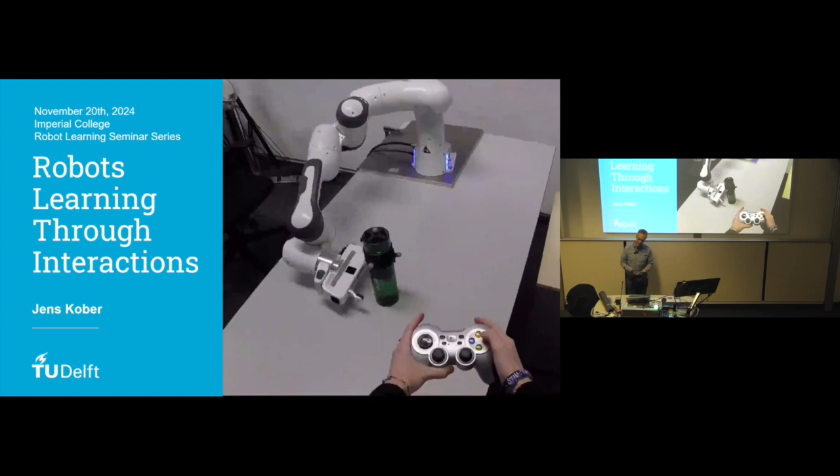Before I actually dive into the details of the methods, I very briefly wanted to start with an introduction. It's not going to be terribly scientific. I'm not an expert on that, but like many people, I at least take inspiration from human learning. And I believe there's lots of parallels between how humans learn and how robots potentially can learn.

I guess all of you are familiar with imitation learning and reinforcement learning. Imitation learning is the idea that a robot learns from demonstration and then tries to mimic that, which works fairly well for simple tasks. For more complex tasks, like humans, robots also need to practice, which you call reinforcement learning. And to actually make those work nicely, there's many ideas you can take from human learning.

So effectively what you do is build up a skill library and then try to figure out if you can actually transfer one of the previous skills you've learned to something new. And there's quite a lot of approaches in robot learning that do very similar things.

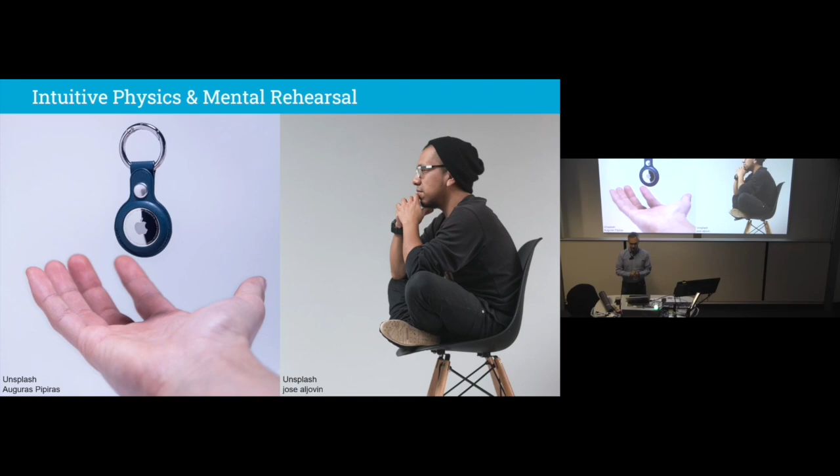So this talk is really going to be about teaching through interactions, to have some kind of continued student-teacher interaction, which could be additional demonstrations, some other kind of feedback, not continuously, but once in a while, so intermittently. When we started working on that about 10 years ago or so, there wasn't much out there, but that's now actually coming up more and more in robot learning, where people realize that really you can speed up things if you pick the human's brain.

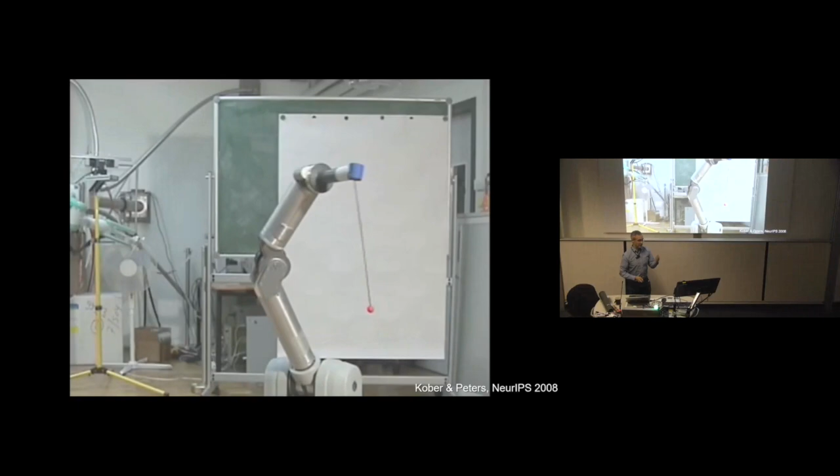Okay, so we actually showed her how to do that first, similar here for the robot. One initial demonstration: if you just play that back, it kind of works, but it's not really accurate enough. After some trial and error, it's a lot closer. After about 45 trials, it sometimes goes in, usually bounces off, and after 100 trials, it has nicely converged. If I give the toy to one of you, usually it takes around 20 or so trials until you get it the first time. So same order of magnitude, but then the question is, can't we do better?

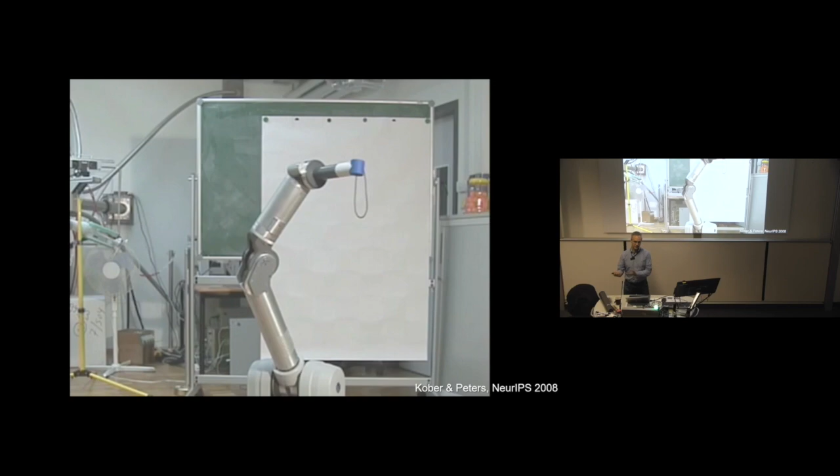Yeah, and that's where the interactive learning comes in.

The feedback could be quite different things. On one end of the spectrum, you could say let's just do binary feedback, 1 for success, 0 for failure, so evaluative feedback. That's probably fairly easy for the human teacher. However, like in a sparse reward setting for reinforcement learning, that's not going to be very informative for the robot agent. On the other end of the spectrum, the task of the human teacher could be to provide the perfect action for a certain state, which makes it somewhat close to more classical imitation learning.

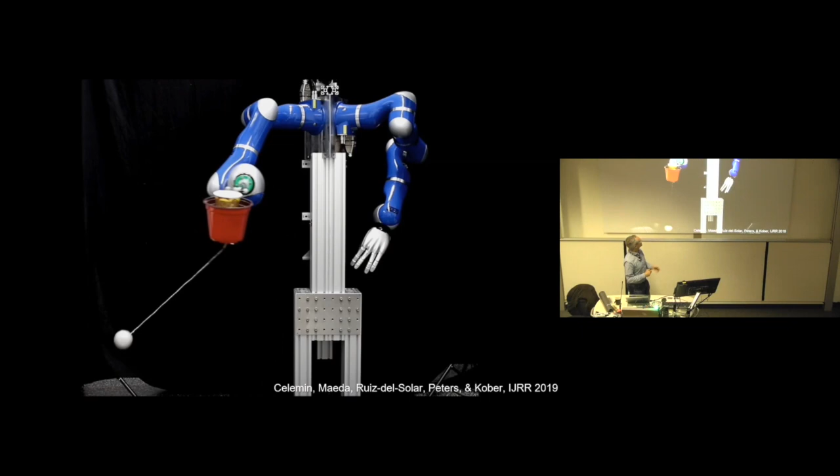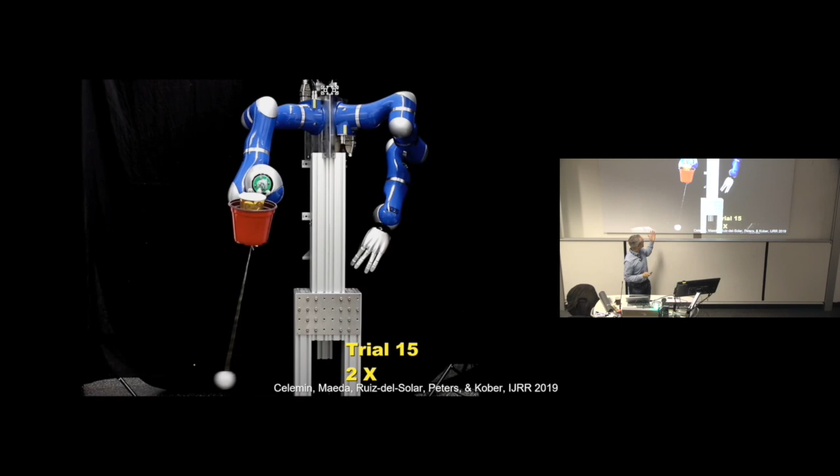So now, again, ball in a cup. Now we can actually start from scratch without an initial demonstration. What you don't see is Carlos, my former postdoc, providing corrections with a keyboard in front of the robot, like move left, right, slower, faster, these kinds of things. Then it takes some 20 trials or so until the robot can catch the ball in the cup. And here once more in slow motion.

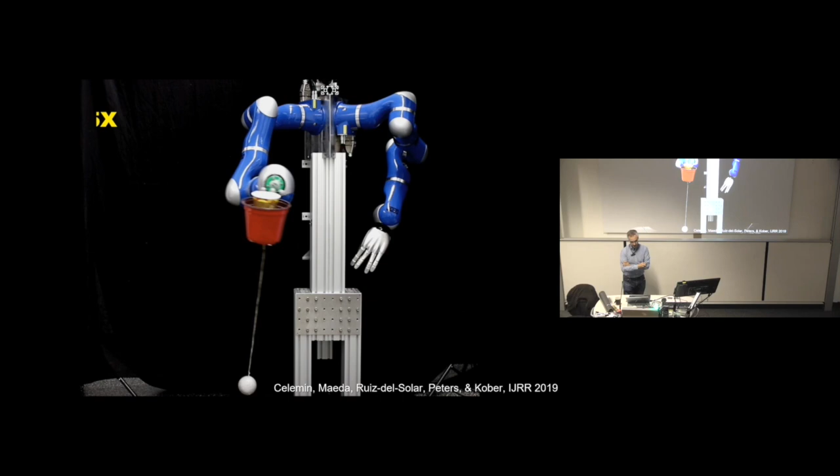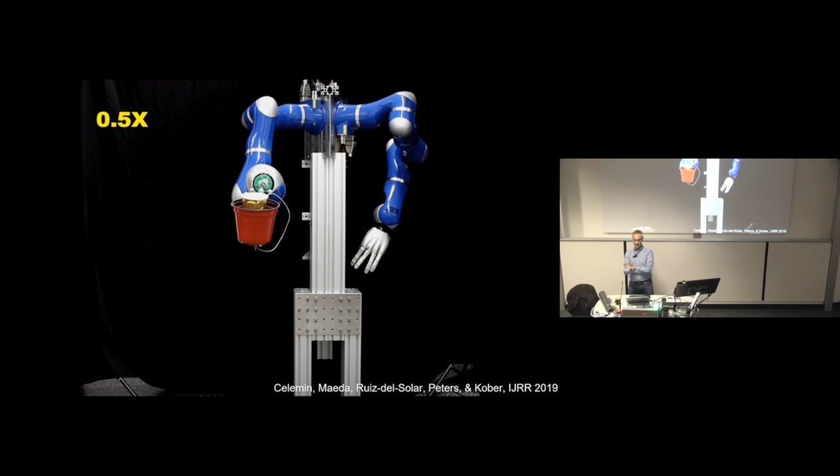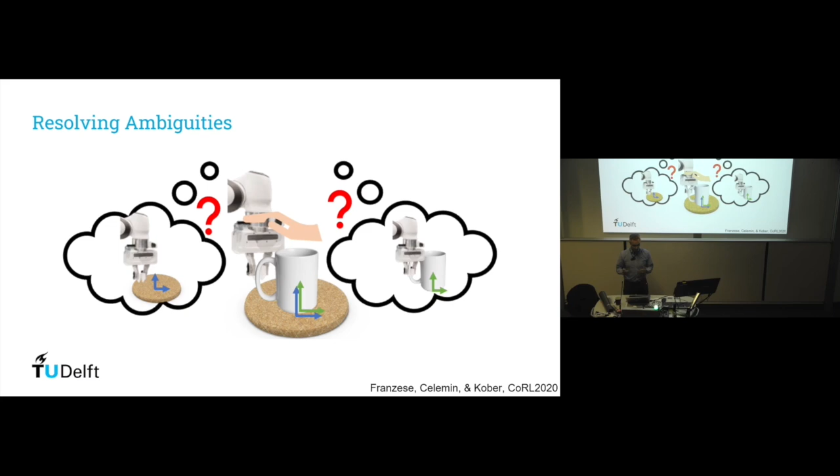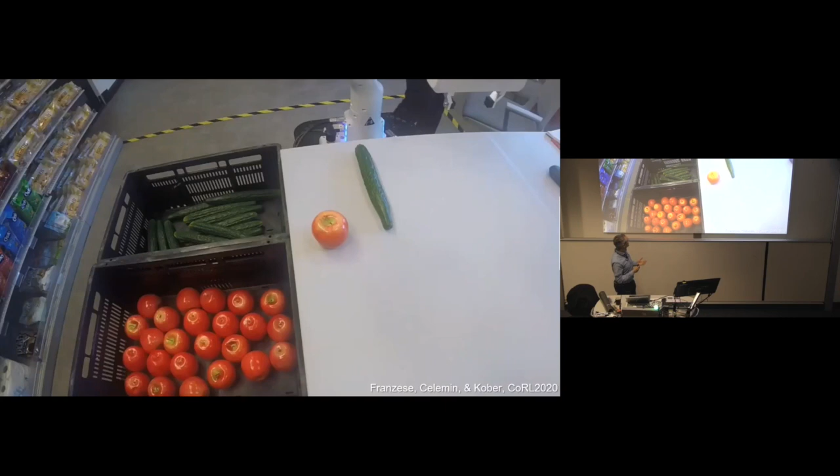So that looks something like this. We already taught the robot how to pick up the cucumber and put it into a crate, and it can generalize that to different initial positions of the cucumber. But the crate with the cucumbers always was here at the bottom, and now we flipped the position of the two crates.

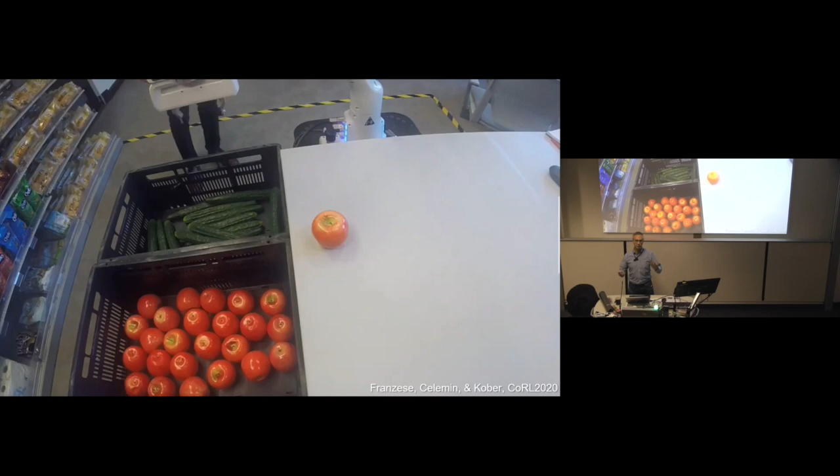Exactly like I had on the previous slide, now the robot needs to decide whether to move relative to the world coordinates or relative to the crate. What it's going to do now is start with the movement autonomously and move as far as it can. Then once it starts hitting this ambiguity, it's going to stop and implicitly request feedback from the human teacher. Then Giovanni is going to just give it a little push in the right direction, which allows it to figure out, okay, in this situation, that's the correct reference frame. And from then onwards, it hopefully can do it autonomously.

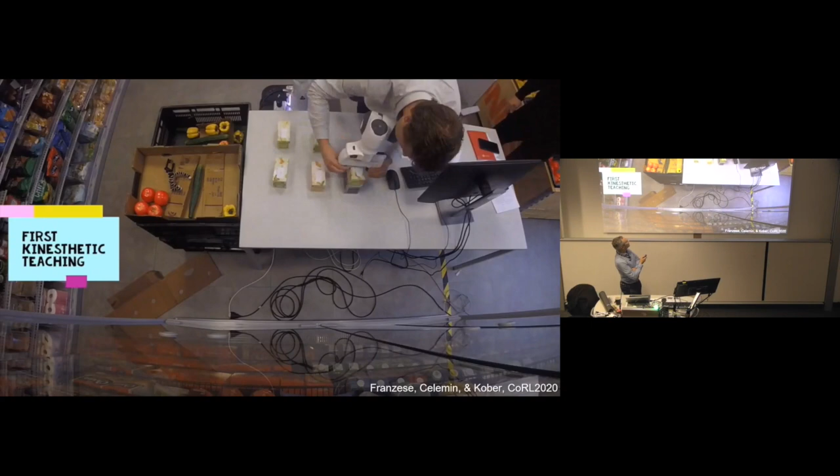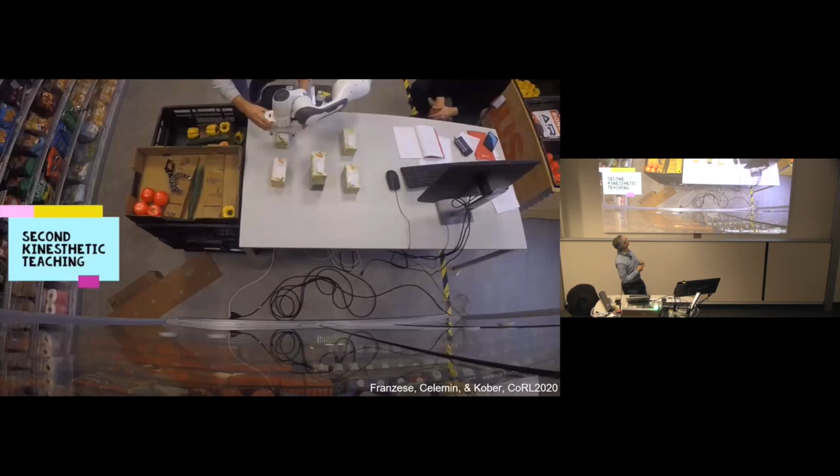We also ran a user study with that, in a slightly different setting. The task is to stack these boxes of tea in a certain order, what should be on top of which is defined. And then we compared kinesthetic demonstrations, where you, as a teacher, need to make sure that you provide all the different configurations that give sufficient statistics to disambiguate the different possibilities.

And quite often you'll actually figure out, okay, I forgot one configuration, and you kind of implicitly get this interactive approach already, that you start providing a bunch of demonstrations, robot learns, you test it, doesn't work, okay, you need to go back, provide more demonstrations.

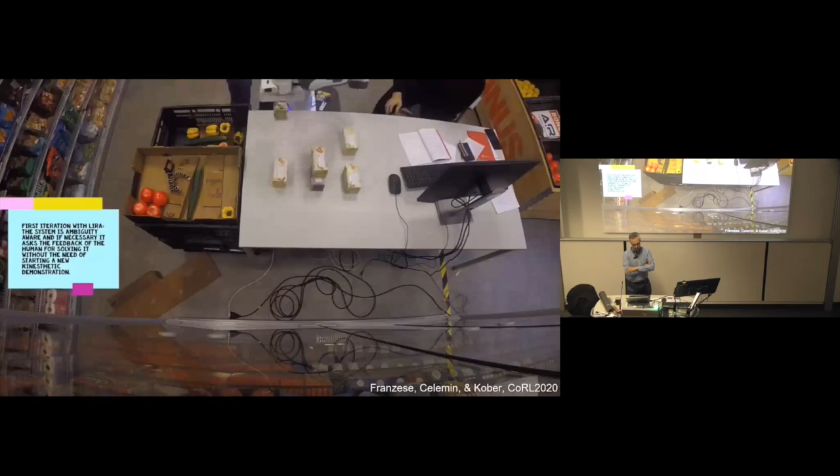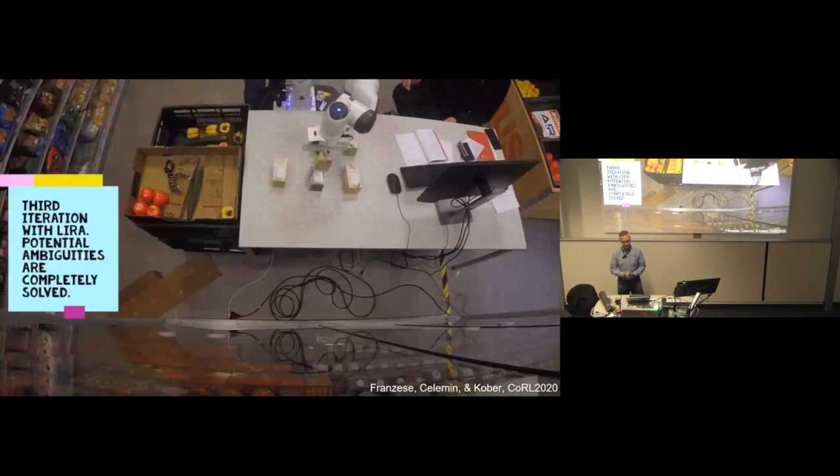Then we compare that to our interactive approach, which is called LIRA, learning interactively to resolve ambiguities, where we start with a single kinesthetic demonstration. And then the robot, again, tries to do it as autonomously as possible. And when it's unsure, it's going to request user feedback. And it just takes a couple of iterations until it can learn the task.

And if we talk to them, they really preferred it, A, because it's quicker to teach, and B, because the robot actually does quite a lot of thinking for them and guides them in the process, and it just makes it a lot more intuitive to teach. So that was more on the level of the sequence and figuring out some higher level parameters.

Now I'm going to go back to the example I showed you in the very beginning on having a little robot drive. But now we actually want to move to having images as inputs. It's going to be very standard and classical, using some kind of an autoencoder structure to get a compact latent representation on top of which we can then learn the actual policy.

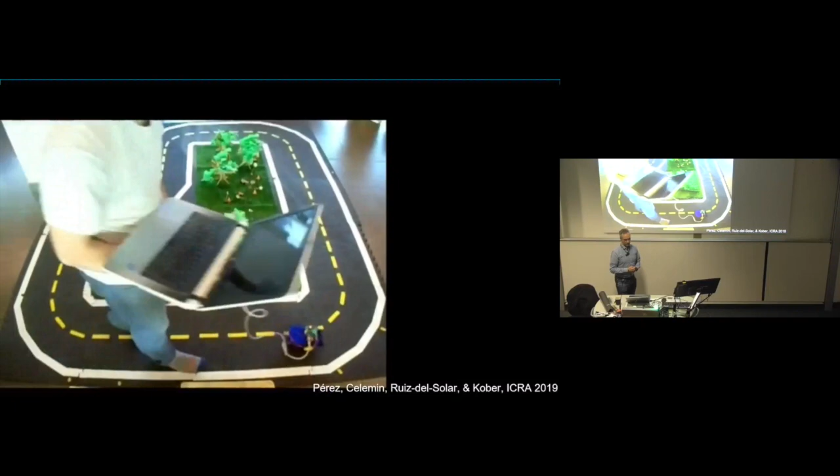And now you can actually see how that looks here. We provide feedback using the arrow keys on the keyboard. If you want to see how well it does, you take off your hand, see if it does well enough. If yes, you're happy and you're done. If not, you just continue providing a few more corrections. And it takes some 10 minutes or so for training the task. From scratch, no simulation, no pre-training whatsoever.

There, what we did was just use a single image, and that's sufficient for steering if you want to drive at a constant velocity. For more complex tasks, you could stack some images if you want to reconstruct velocities as well, or some other tasks might require other forms of memory.

And then again, very classically, you put in some recurrent unit, in this case an LSTM, in order to actually have the latent representation with some memory. And then the other thing that changes here is that now the reconstruction is not the same image, but the image of the next time step to actually capture the dynamics.

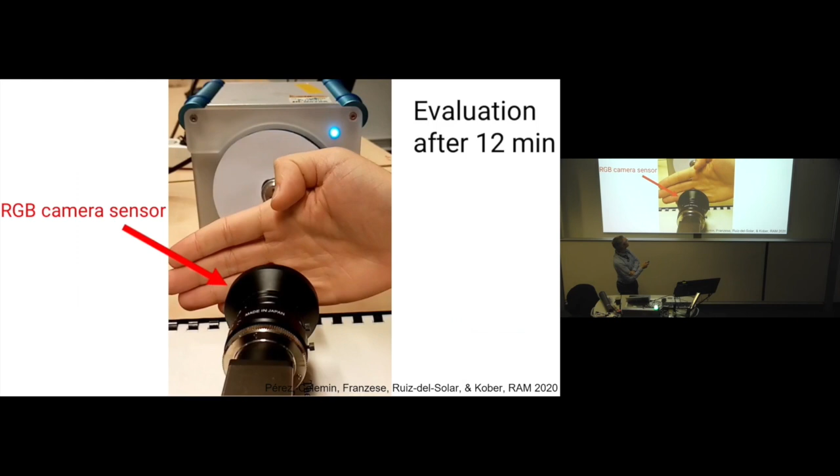Here's a very simple setting of an inverted pendulum swing up. We can see the network input and then some predictions, and then again it takes a couple of minutes to learn it. And it can do the task purely based on visual input, not using the encoders that we have in that system as well. So it's a weight on a disk, which is physically equivalent to a pendulum.

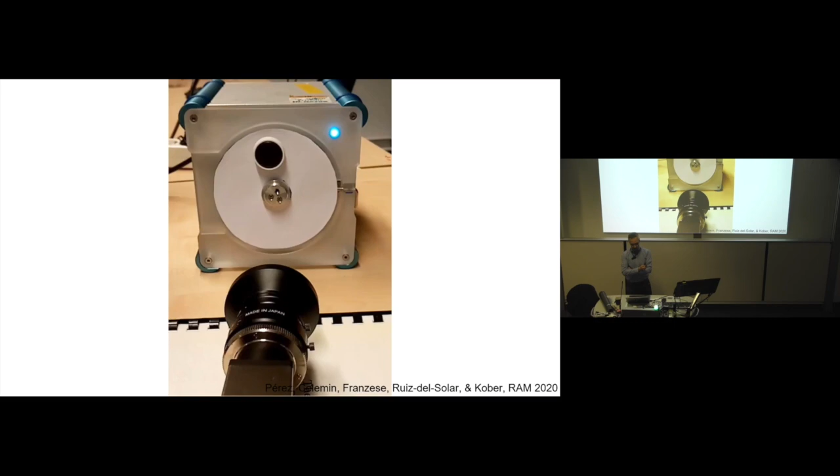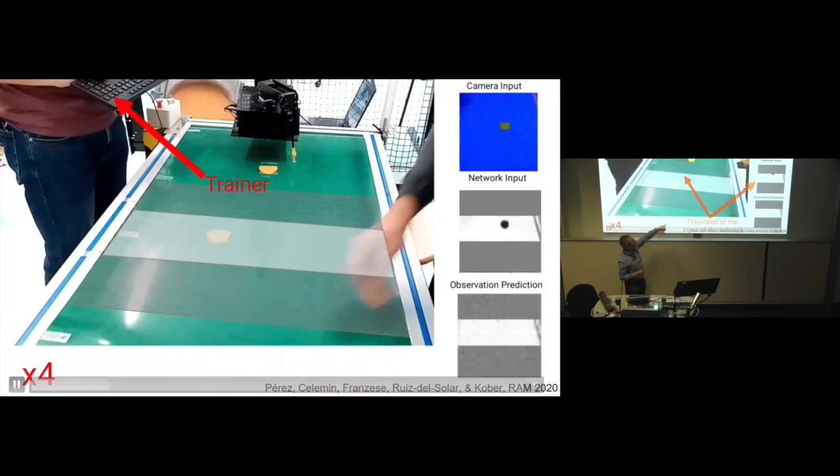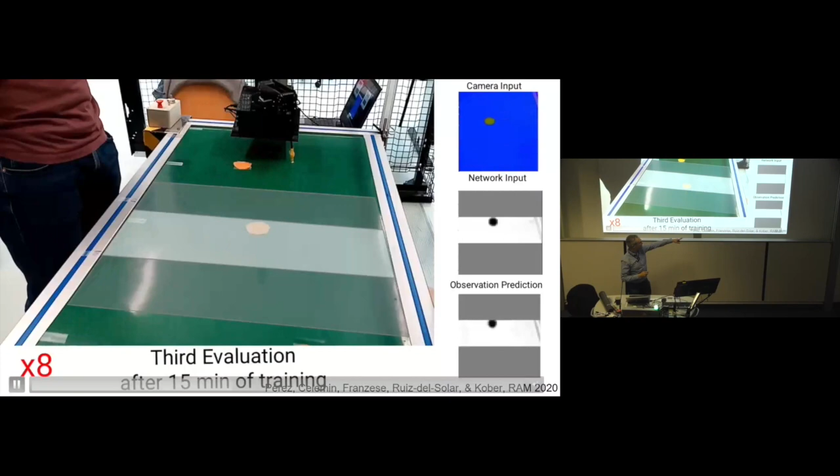And then here the other example, we have a different form of memory. What the robot sees is the camera input on the top. However, what it can really see is only this white part here, and then you see in the middle there the cropped part. So it actually needs to memorize where the fake oranges are in order to be able to touch them, whatever, half a second later. And on the bottom, again, you have the reconstruction.

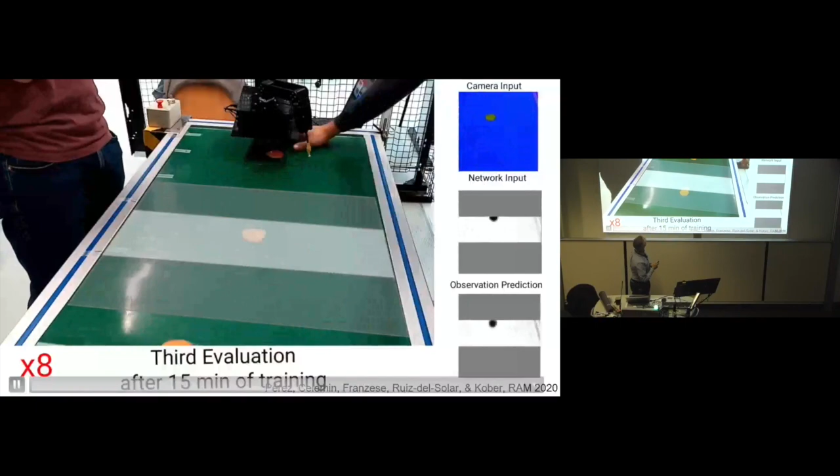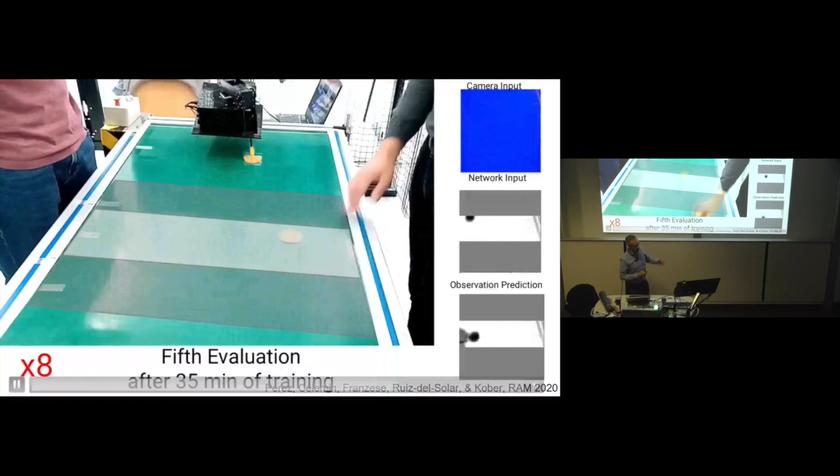So as you could see in the video, already after 15 minutes, it does pretty well. And then after 35 minutes or so, it has nicely converged. And there, again, you could see the keyboard we use for input. And then what's really cool is if we have already a decent representation and we want to generalize to a new but related task.

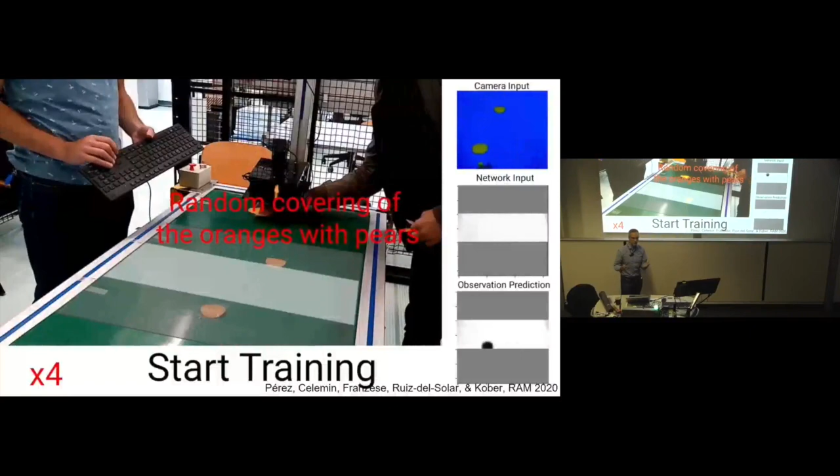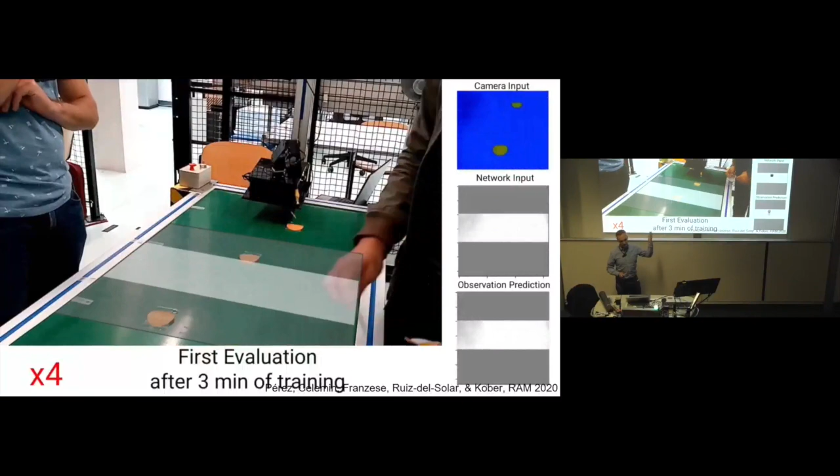So in this case, it's avoid those pears. You can continue training to adapt it to this new task. So you provide a few more corrections, you could see it with the keyboard there. And then literally after 3 minutes, it already does a pretty good job at that.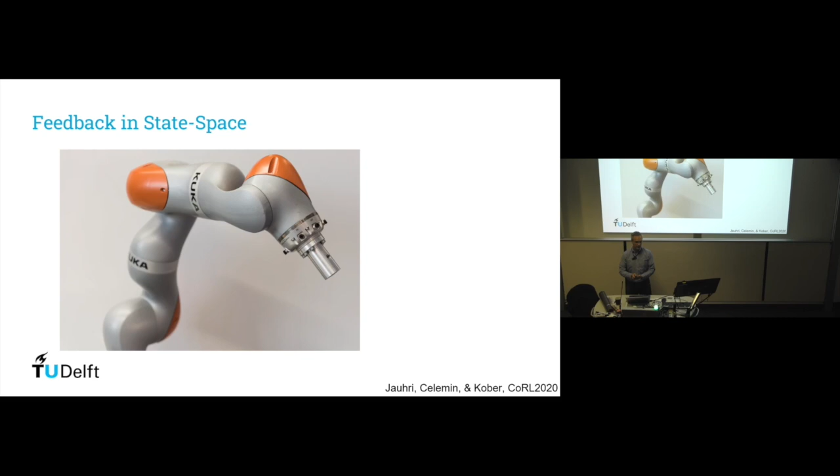So far the corrections were actually in action space. However, that's obviously very direct. But if you look at this kind of robot here, it starts to get high dimensional. And as you can imagine, doing things in joint space, if you're not a robotics expert, or even if you are a robotics expert, gets to be quite non-intuitive. So rather than doing that, you might want to do it in state space or end effector space. For that, you would need some inverse model that maps from the end effector position to the joint configuration.

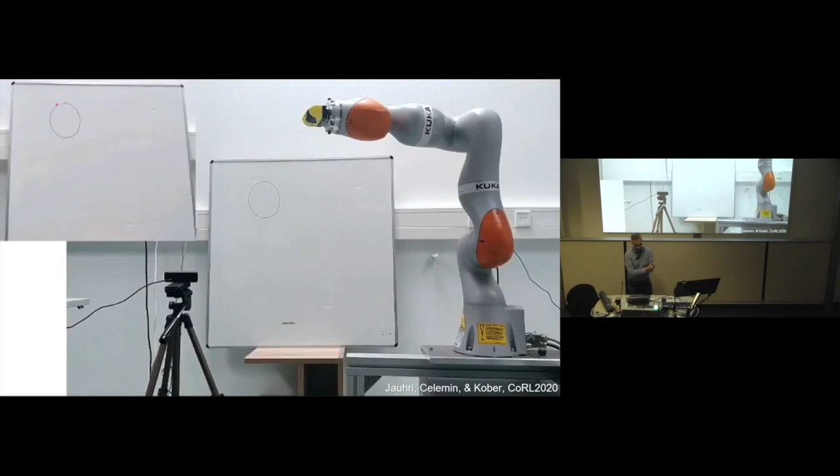For robot manipulators, you have your built-in inverse kinematics, so that's all nice and good. But for some other tasks, you might actually not have that. So what we wanted to look into is actually learning this inverse model and the policy at the same time. It looks something like this. So the task here is to trace a shape on the whiteboard using a laser pointer that's attached to the end of the robot. And then the corrections we want to do are really in the space of the whiteboard, so you want to move around on the two-dimensional space of the whiteboard.

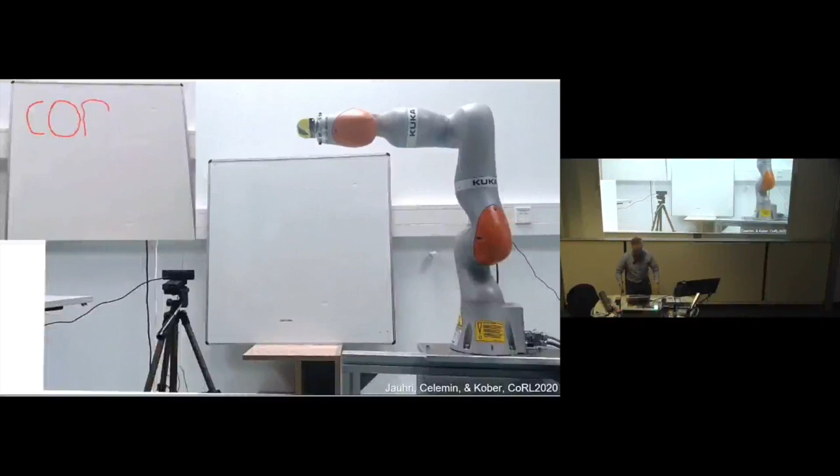Yeah, you could do some calibration and figure it out. But here, actually, it's learning both the inverse model and the policy at the same time. And then, again, within less than 10 minutes, it can do the task. And yeah, as you can see, it was a publication for CoRL, so your CoRL, actually. And so here's the final result.

Yeah, the tasks I've shown you so far were essentially kinematic trajectories in free air, but I believe things become a lot more interesting if you're actually in contact with the environment. So that's what the next bit is going to be about. The first one I want to talk about is an approach we came up with for learning both trajectories and then forces, or in this case actually an impedance controller, so the stiffness and damping.

If you do these kinds of tasks where you have interactions with the environment, it gets a bit tricky depending on what you do. If you're using kinesthetic demonstrations, then touching the robot screws up some of the sensor readings. If you can get away with it, kinesthetic demonstrations are actually the most intuitive for users in our experience. But then in this case, we need to switch to a different modality of feedback after that initial step.

So what we do here is we provide one initial kinesthetic demonstration that's mainly used for learning the trajectory, which in this case is represented by a Gaussian process model. And then we use a space mouse or a 6D mouse to provide corrections that are going to be used to adapt both the trajectory and the stiffness. Very classical whiteboard wiping task. Here's the initial demonstration.

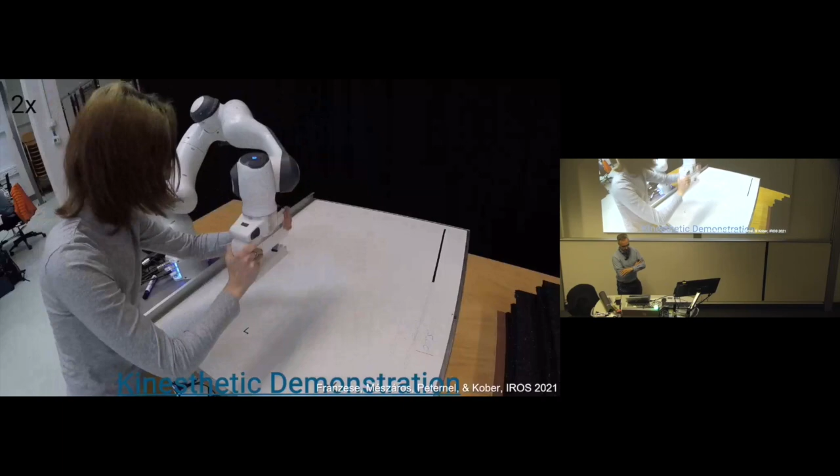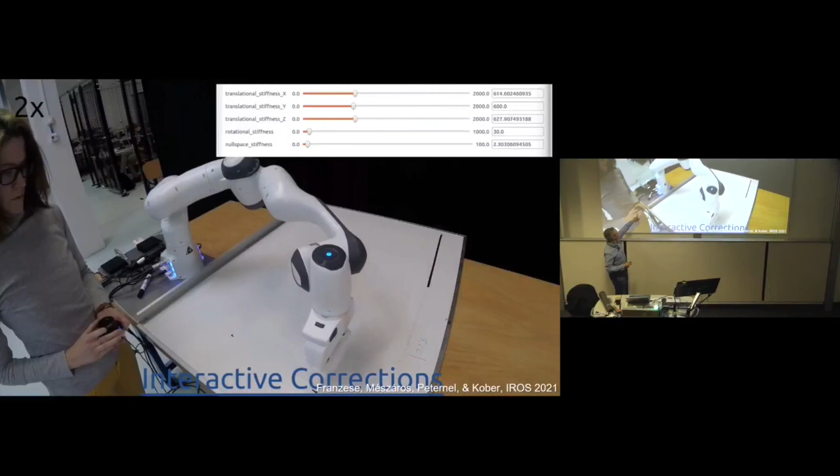If you just play that back, it didn't know that it's supposed to apply a force, or more precisely to have an attractor that is actually below the surface of the whiteboard. So what Anna is doing now is pushing down on the space mouse in order to provide a correction when it's in contact with the whiteboard. That's adapting both the trajectory, and what you see on top is also the stiffness.

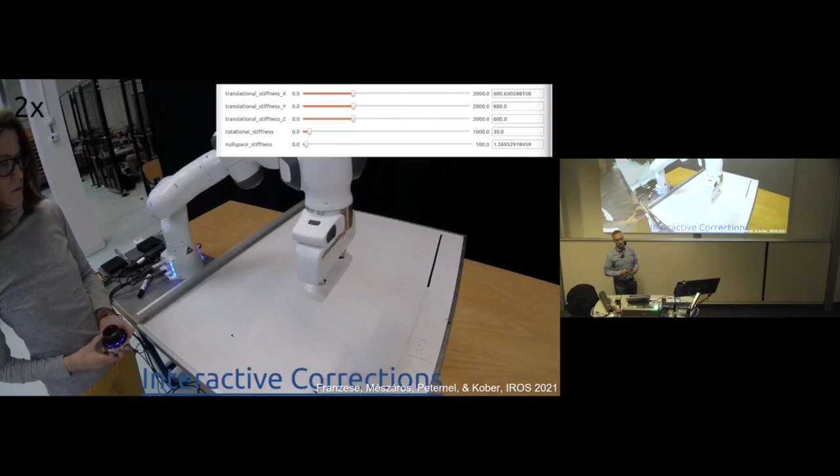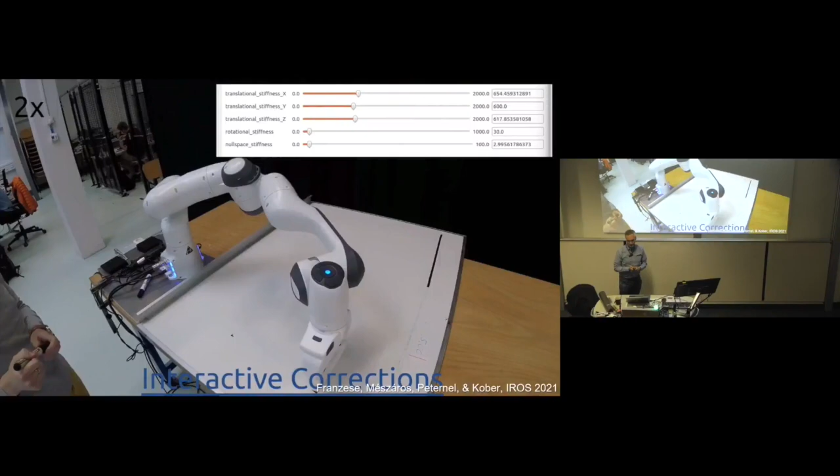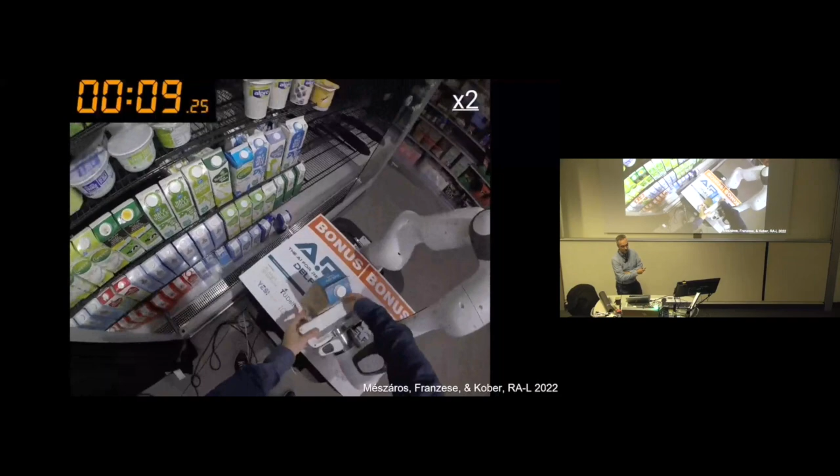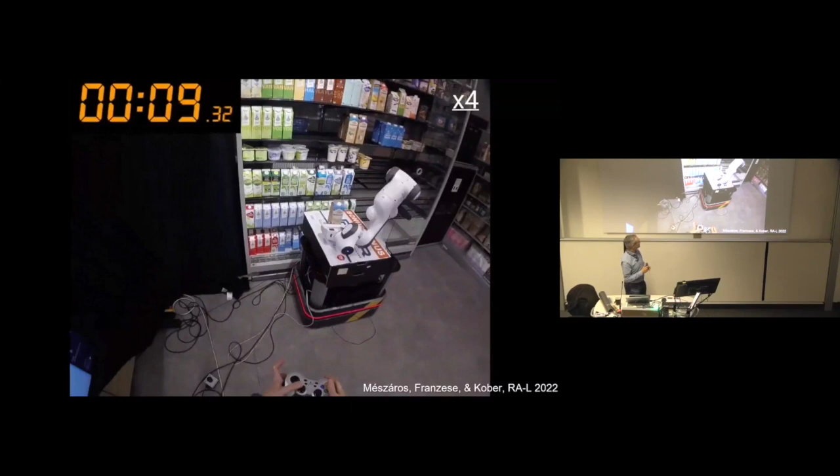Here's another example, a different kind of interaction that was from a project together with a Dutch supermarket chain, where they were interested in seeing how far you could get robots in a retail setting, and then for restocking, they told us really you need to get it below 5 seconds, so that makes any kind of sense.

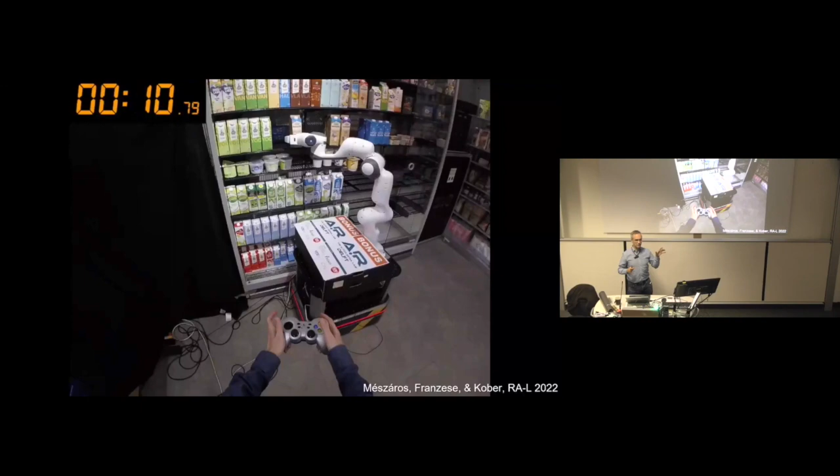Also here we started with an initial kinesthetic demonstration, and now we're using these interactive corrections to both correct the movement or the trajectory, but then also to tell it in which parts of the movement it can speed up. So initially it was some 20 seconds or so, and now slowly we are pushing it towards getting to 5 seconds. So now that's in real time, the movement.

Maybe one additional interesting tidbit is, not sure if you've worked with a Franka Emika robot. The gripper is kind of crappy, and the timing of the gripper for us was plus minus half a second. So we actually need to teach a trajectory that is robust to that imprecision in the robot itself.

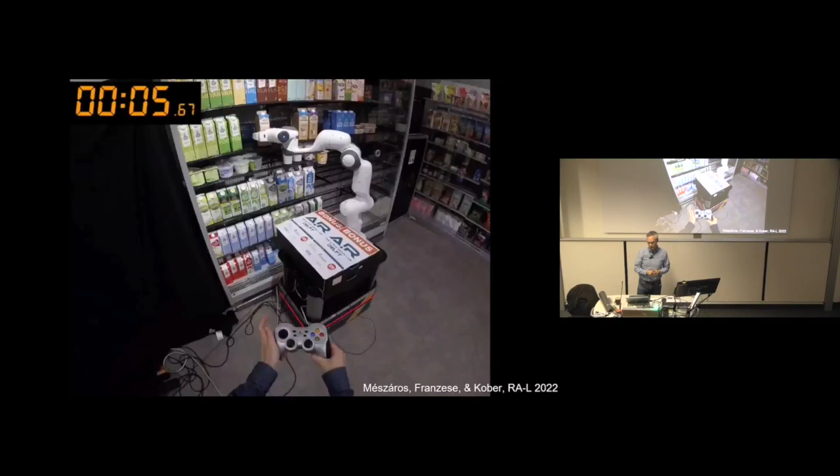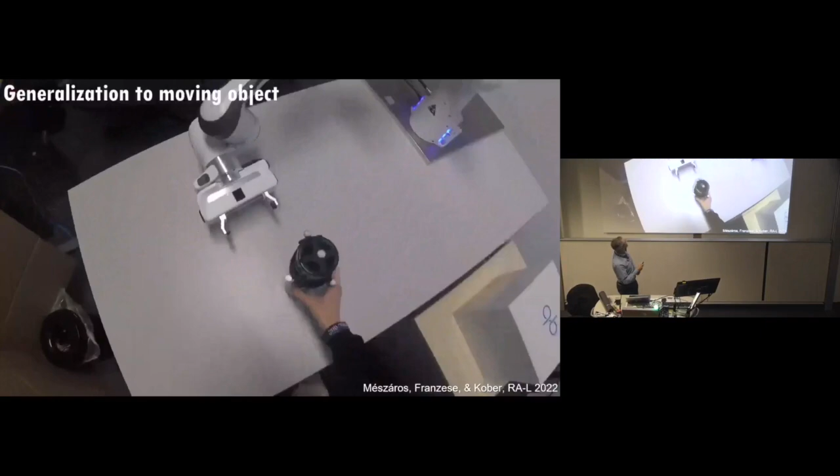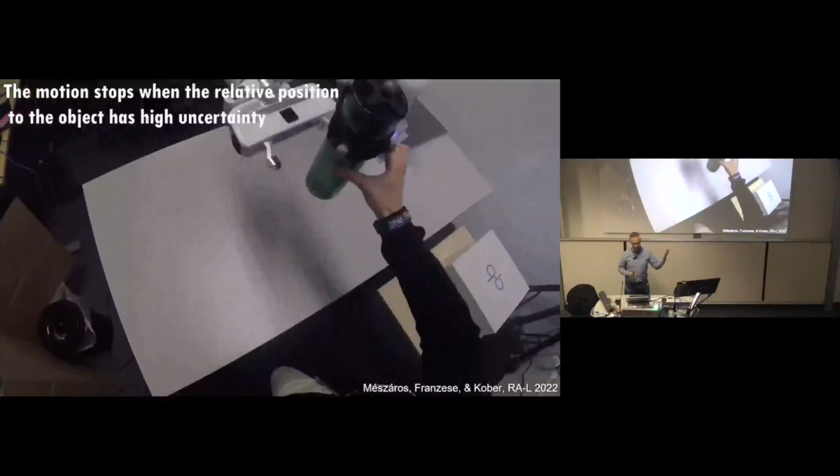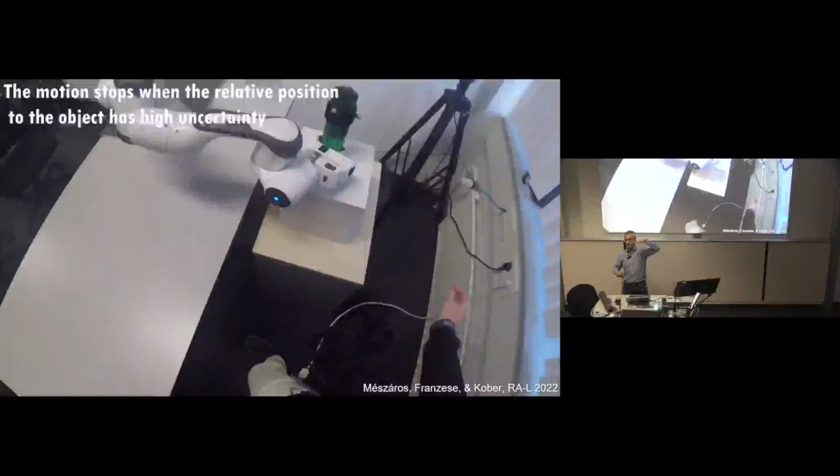Here we also did a user study with that. That was then a simplified setting. And here you can also see how you can actually extend it if you have some form of perception to be able to deal with moving objects. And what you could see here in this final bit is if you start moving too far away from what it has seen, then it becomes very uncertain, but the gradient of the uncertainty also becomes flat. So it just doesn't do anything and is safe in that sense.

For the user study, we really thought that people would very much prefer being able to teach the trajectory corrections and the speed of the movement separately, because we thought that would minimize the mental load. Turns out we were maybe 50% correct, so there was really a nice bimodal distribution of participants. Some participants very strongly preferred teaching it with the separate two input modalities, while others really strongly preferred teaching it all together and then just using corrections to kind of push it forward in order to speed it up.

Yeah, so the feedback we got was doing it separately really allows you to focus on one of the things, while the other people said it's too demanding to think about which of the modalities I want to use now. Unfortunately, it seems that there's no one-size-fits-all in terms of how users like to teach robots. And also, it differs quite a lot between different user groups. People that are avid video gamers, they're very good at these kind of things, and they actually have quite different preferences than people that don't.

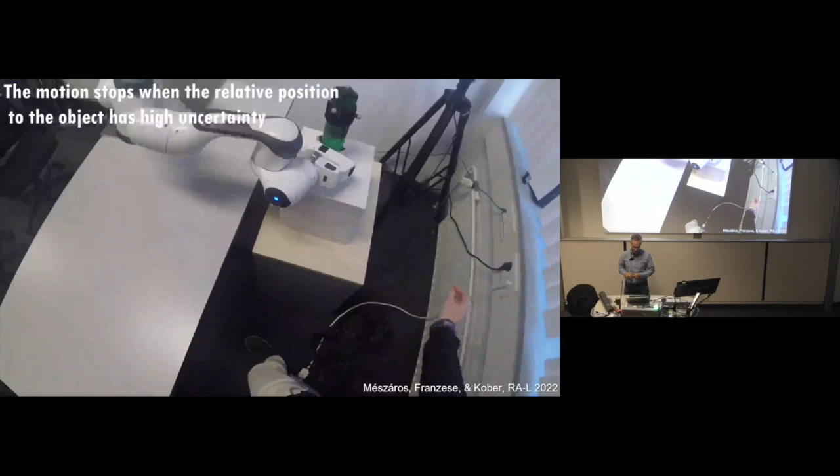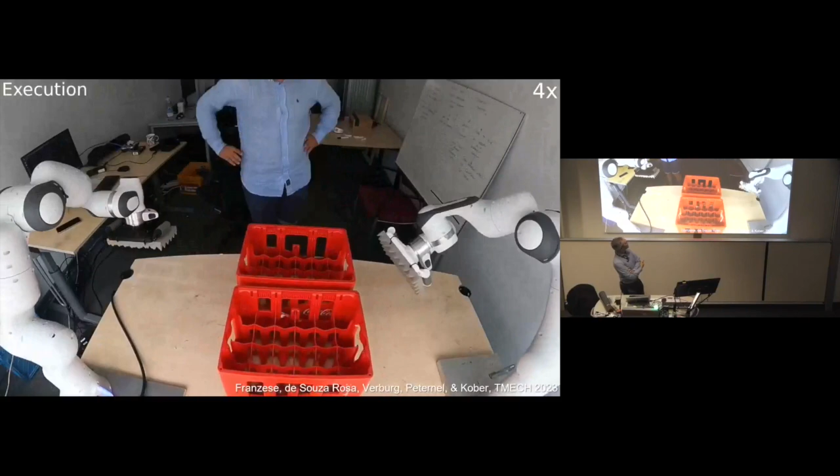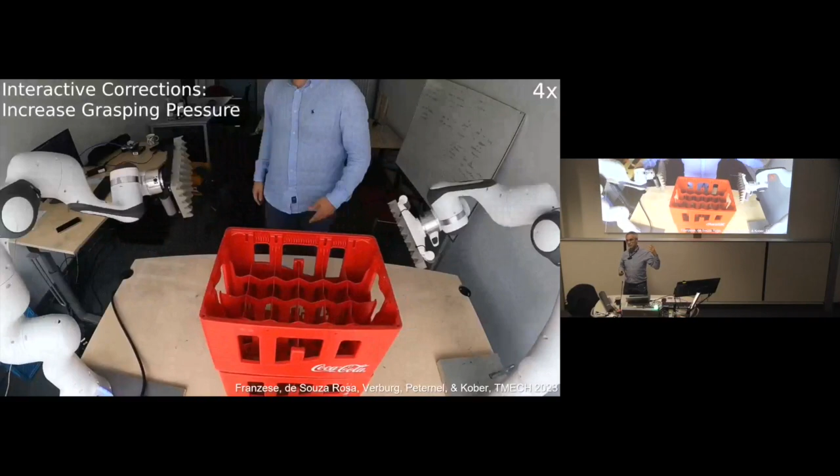Here's one other approach, extending it to bimanual settings. One of the big questions was how do we actually make it feasible for human teachers? And what we came up with is teaching the two arms separately and then using corrections both for the trajectories and for figuring out how they should be synchronized. And then you can do these kind of tasks like moving crates, but also handover tasks and so forth.

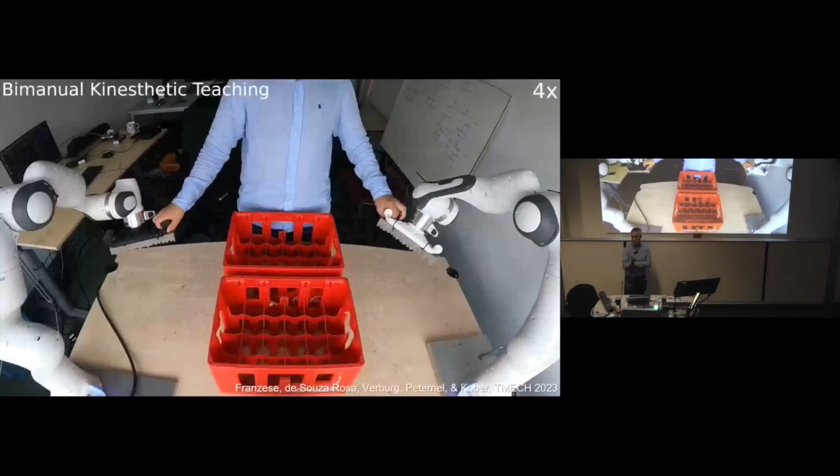You can also distinguish between different types of uncertainty. Maybe it's epistemic, and you just don't have any data for a certain setting yet, so you ask the user to provide more data. Or if it's aleatoric, maybe you've provided contradictory demonstrations and the system needs to figure out the correct thing to do. For each of these, you could have different instantiations of exactly how the feedback looks. So what we tried in this paper is to come up with a way to combine all these different types of interactions in one framework.

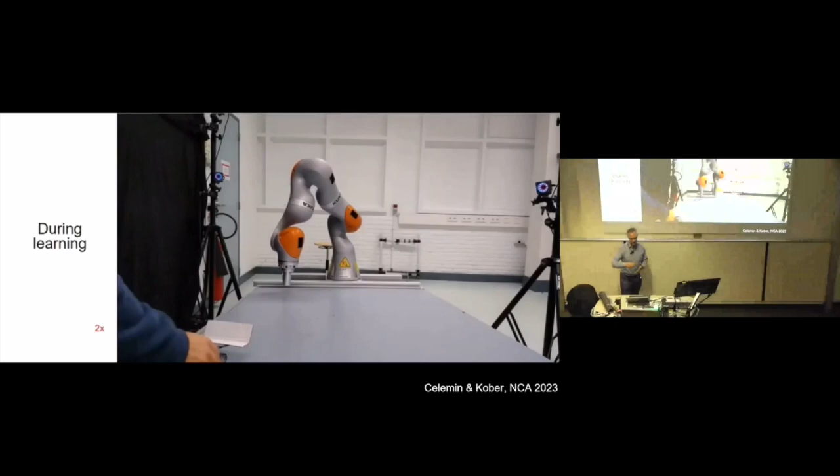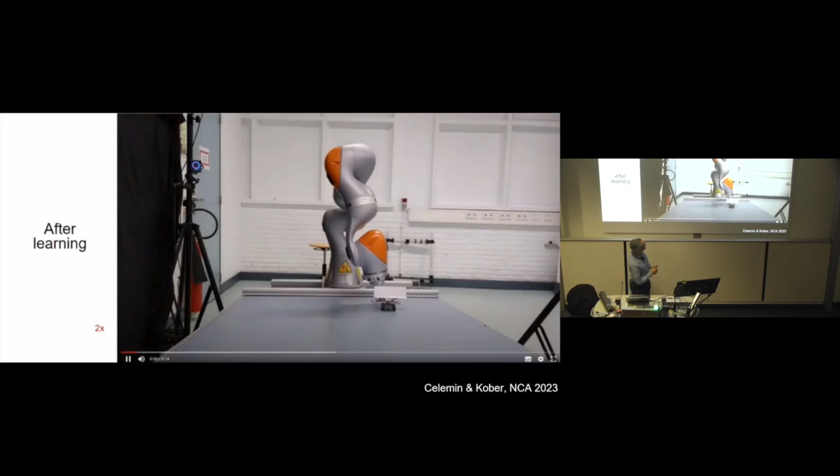From a learning point of view, I think we managed quite well, and it actually works quite well. You can do fun stuff like this very dynamic, air hockey-like task of catching a little card, which is actually too fast for teleoperating the robot. It works very well if you have a simulated teacher, or if you're the first author of the paper and you've practiced with the robot and the framework quite a lot.

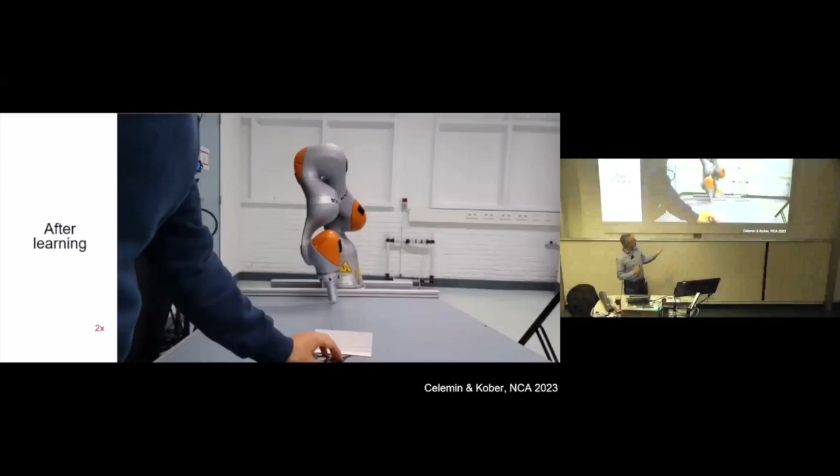However, if you ask people who haven't seen the framework before, it very quickly becomes overwhelming. So there's still quite a lot to do in figuring out how that interaction should look, not only to enable the robots to learn quickly, but also to make it user-friendly.

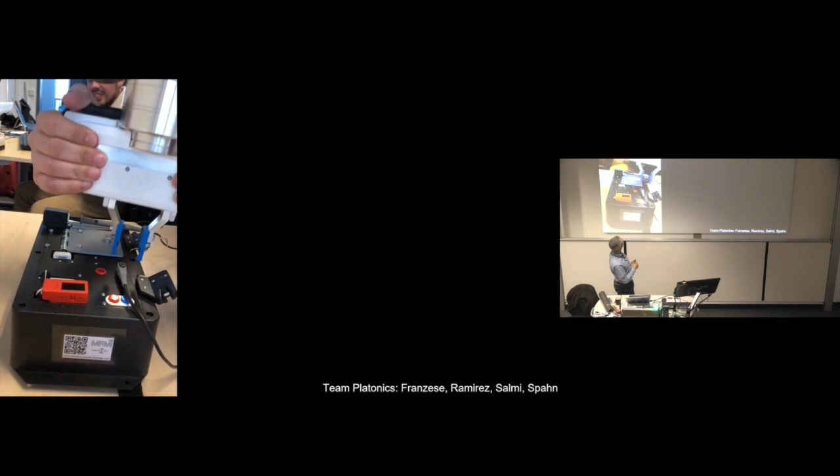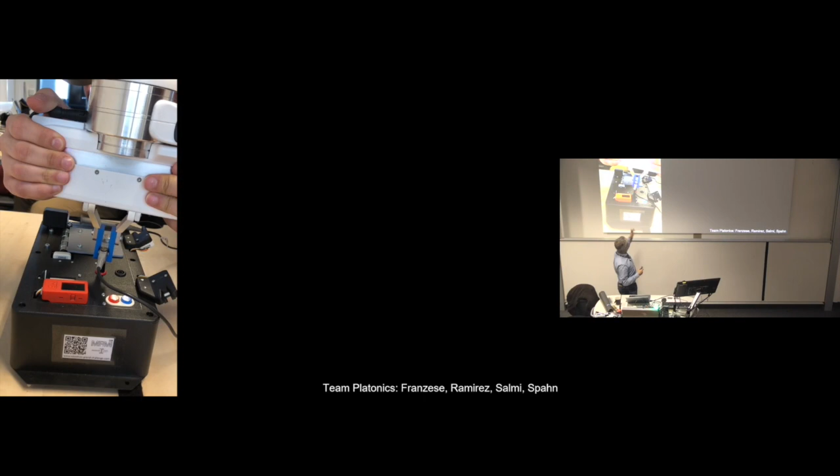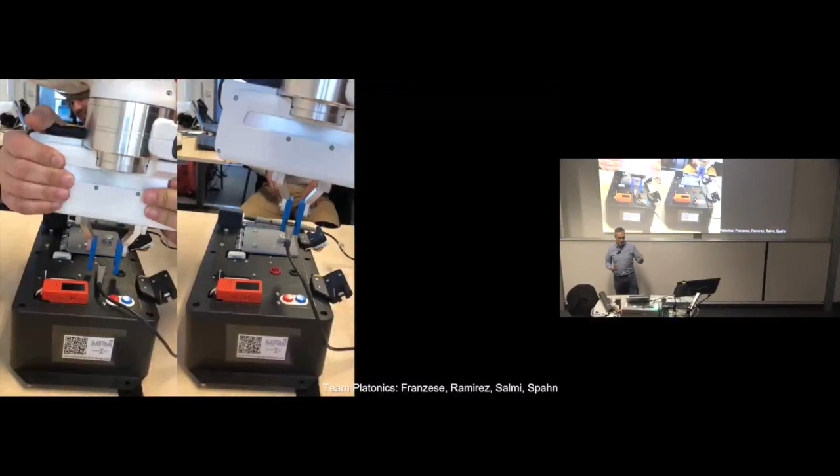The final thing I wanted to show you is from a few competitions we've participated in. Actually, the team won a challenge at IROS a couple of weeks ago. Again, here we start with an initial kinesthetic demonstration, and then we refine the subparts of this more complex task using corrections, but also using some failure recovery behavior. So here you can see a kind of spiraling movement to actually get the plug into the socket, and also using a form of visual servoing for the high precision tasks.

The overall task is a longer sequence of steps, vaguely related to recycling electronic components. You have this box with different electronic probes, buttons, latches and so forth, and you need to do a long sequence of tasks. So here we not only have these failure recovery behaviors, but also, in this case, a very simple finite state machine that decides the order in which to execute the subtasks.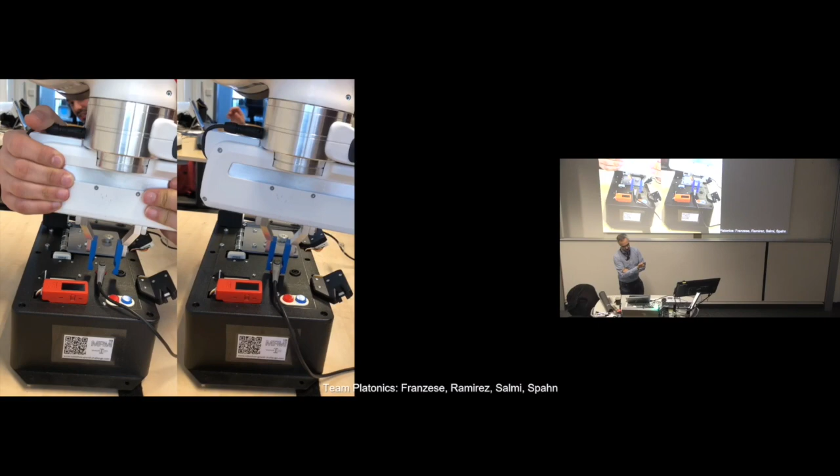And here's a little clip of the end of the sequence. Inserting that probe is actually one of the more challenging tasks, because there's also a ring around the hole. So if you put the tip of the probe into the ring, you get stuck and actually need to pull it out and put it in again, and these kinds of things.

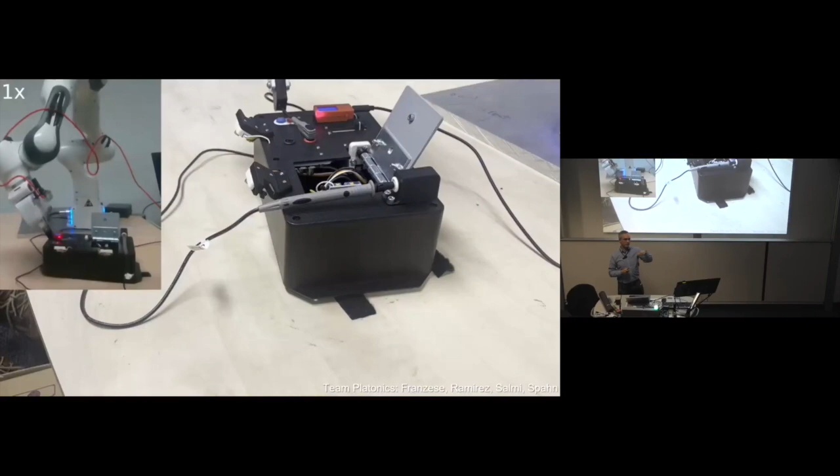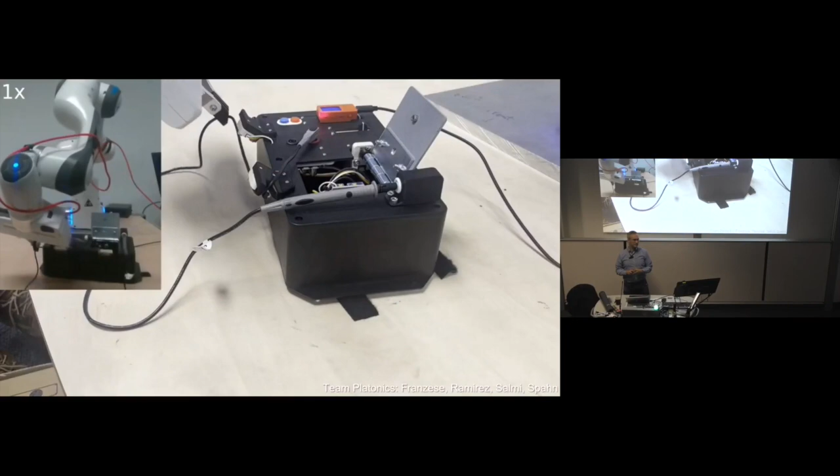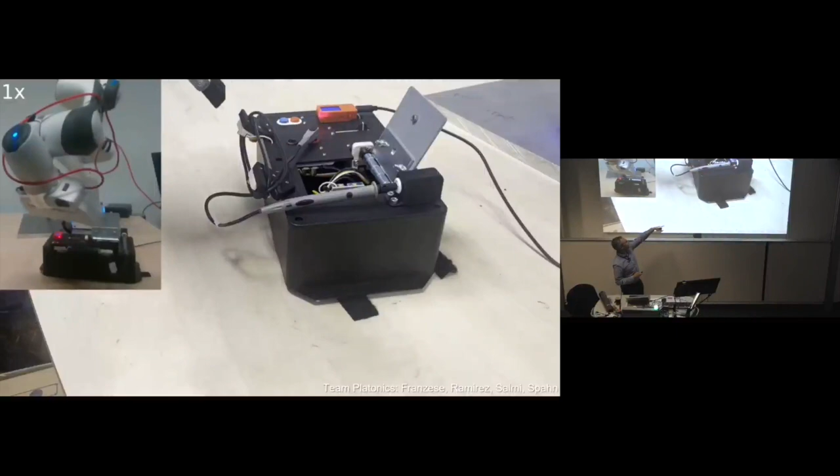The part of wrapping the cable around, we actually thought would be one of the more challenging parts. Turns out it's not that bad, as soon as we had the human insight that sliding along the cable is a very good approach — you can use the physical constraints of the environment to your advantage. And then you can move the box around, but obviously all the parts on the box itself are in a fixed location.

So, to sum up: today I presented some of our work on teaching through interactions, which I hope I could convince you are one of the very promising ways of speeding up robot learning, because they really play to the complementary strengths and weaknesses of both the human teacher and the robot learner.

I think these kinds of methods are very promising, not only in isolation. What I showed you today were very narrow tasks that you could learn very efficiently, but there are many ways you can combine them with other methods. For example, you might use a more generalist model based on a huge amount of data to provide the initial movement, and then use these kinds of ideas to fine-tune it, to really tailor it to the specific situation at hand, very efficiently.

The methods I showed you today, the videos, were really learning from scratch on the real robot, no simulations involved. But why not use simulations to very quickly get an initial policy? You could also use these kinds of things to train the robot in simulation and then do the classical sim-to-real transfer. You can combine them with reinforcement learning and so forth. We actually wrote a massive, almost 200-page survey paper on that, if you want to know more about the general area of interactive imitation learning.

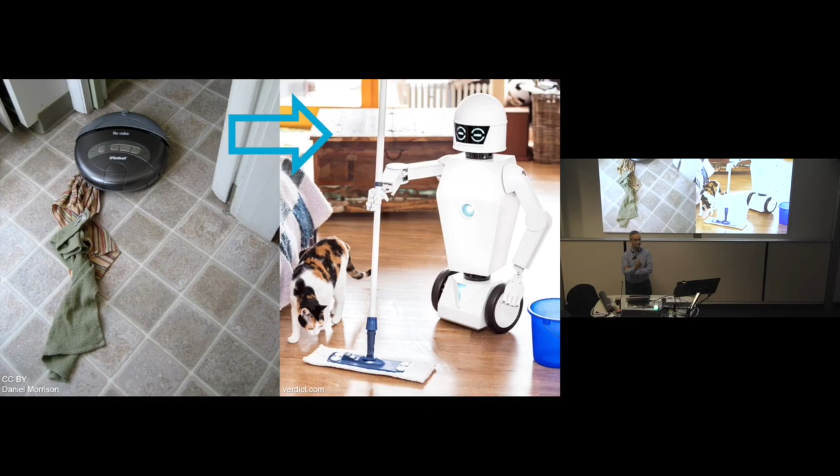So to sum up, I showed you quite a few methods and ideas on how to speed up robot learning. So actually it was very much the humans helping the robot to get unstuck. However, obviously that's not our ultimate goal. Really, that's just kind of a means to an end in order to help robots help us and make our lives easier.

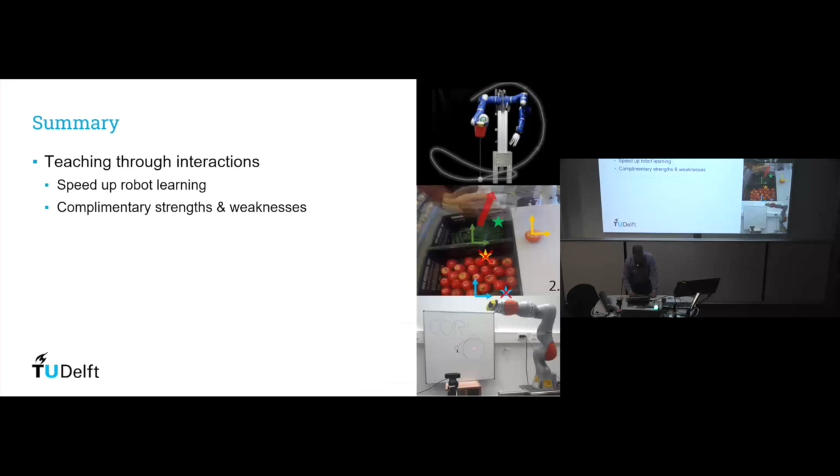What was the name of the last paper that you showed, where you take the cable and wrap it around? So this one, you mean? That one, yes. So, it's not really a paper. We have a very old version thereof, kind of a tech report that is on arXiv. However, if you Google that name, I can also give you the website. They actually provide all the source code and some documentation and some explanations on their website.

So it's a mix of using vision in different forms. How it effectively works is it does a rough visual calibration based on the location of the box, so you know how it's transformed. Then, as much as possible, the movements are purely kinematic and not taking visual feedback into account. If it's not very precise, then having the rough calibration relative to how the box moved is good enough. For more fine-grained, precise tasks like inserting the probe, you need the visual feedback additionally. So it's kind of a visual feedback on an as-needed basis.

I was wondering if you could talk a bit more about... Yeah, so I guess like almost everybody, we've started playing with language models. Some of the things we've been working on is replacing this very simple finite state machine we have here with an LLM to figure out the sequence in which you need to employ these primitives. And we've recently started looking into how to use language feedback for corrections, but that's still in progress.

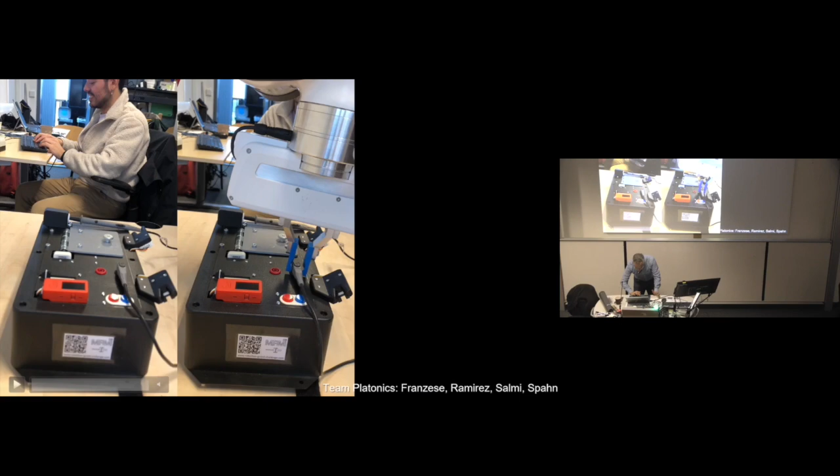Let me see, I think I have the video somewhere in my backup slides. Come on, slow thing. No, why isn't it working?

Come on, let me try to scroll forward a little bit. No, wait, I thought it's in there.

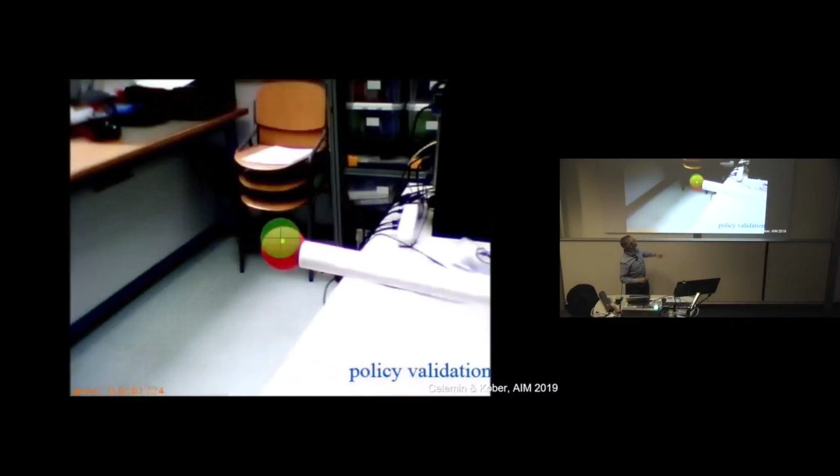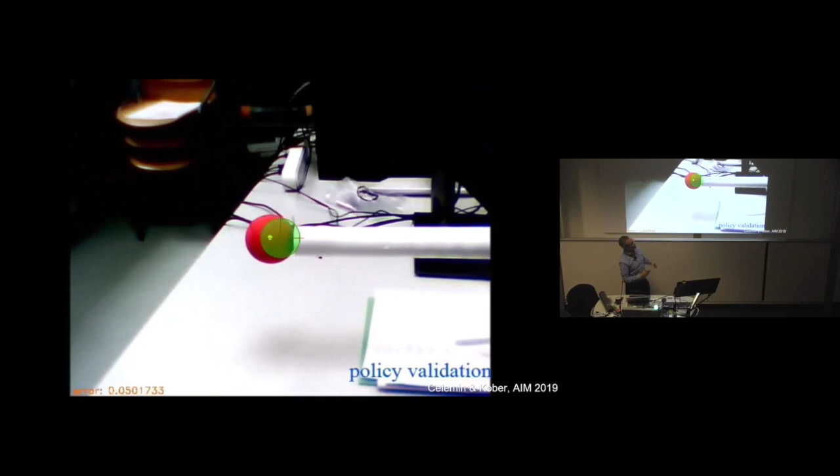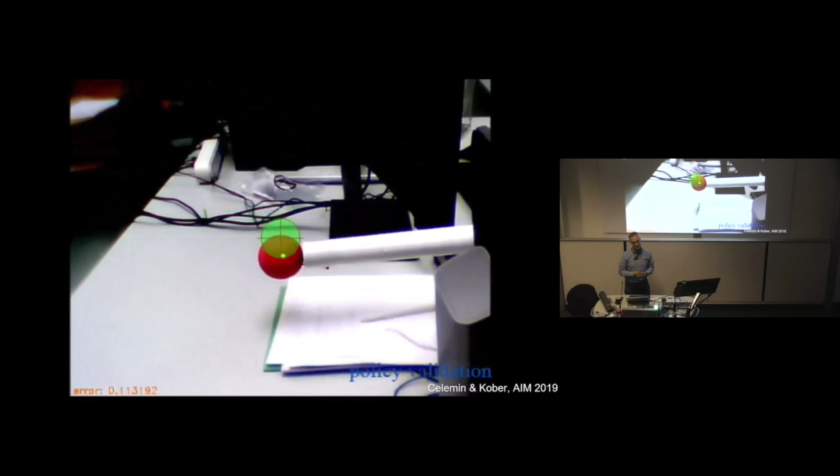Okay, so here it's first based on a screen. The camera has this cross, and it tries to move it to a target. In the end, what we wanted to do is to have it track the red ball. So here we're teaching at the same time that having the red thing at the center is the reward function we want to optimize for, and how to do that. But then we ran into the typical problem of inverse reinforcement learning, that it's not unique and it gets stuck in some kind of local optima if you try to do them at the same time.

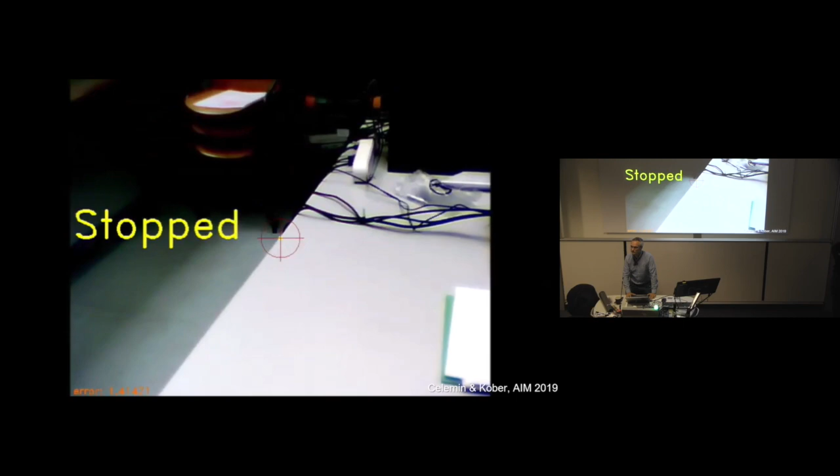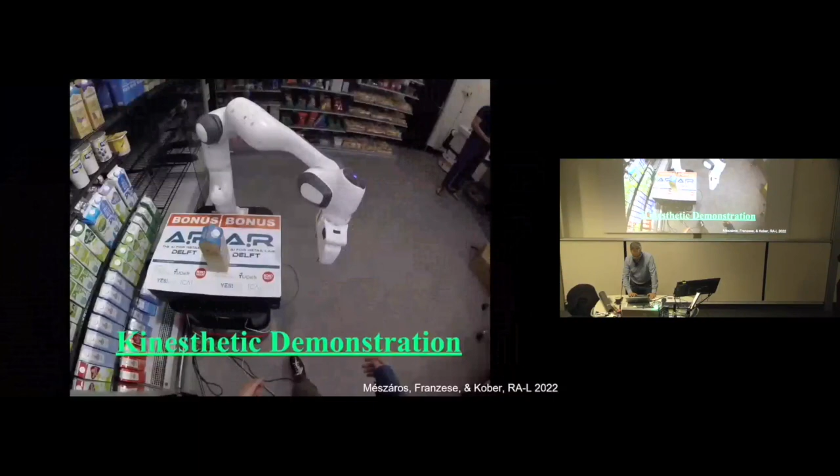Would you be interested in seeing whether there are bifurcations of such a vector field? It looks like you've got a cycle in tracking.

Yeah, so indeed bifurcations are a very interesting problem. It depends a bit on what you want to do. So if you want to do a figure 8 and you represent the state as including the velocity, then you don't have an ambiguity and that works nicely. If you really have an example where you approach an obstacle and you can go left or right around it, then...